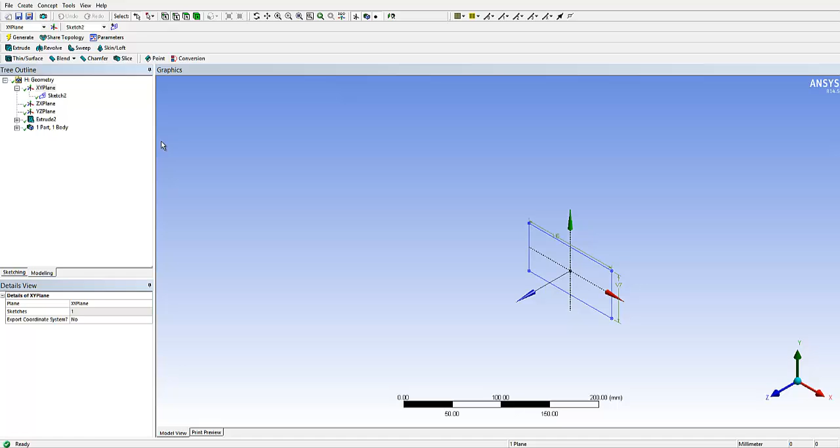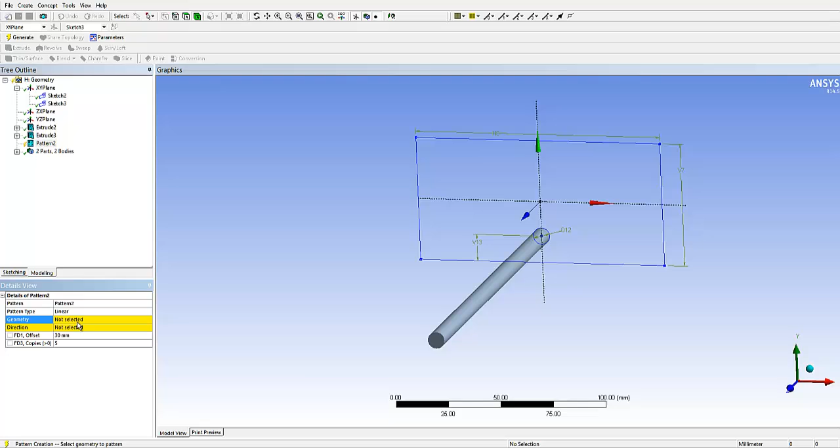In this video, we will be talking about an array of pin fins. We will kick off first, of course, with the geometry of the array. Like the previous example, this geometry involves a set of pins placed inside an enclosure. Here we see how a pattern is being used to make the design easier. The design involves a total of 9 pin fins and, of course, an enclosure.

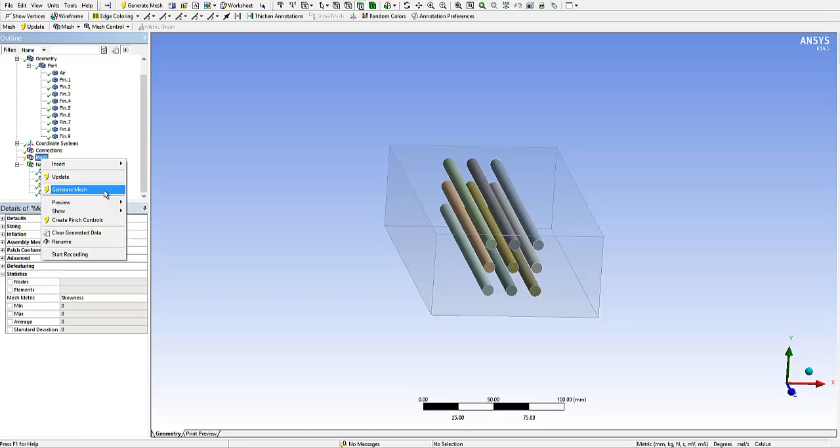After completing the design, we'll now proceed with its mesh. It's preferable to name the parts, or the important parts on which boundary conditions will be set later on in the solver, in order to facilitate the process of assigning boundary conditions.

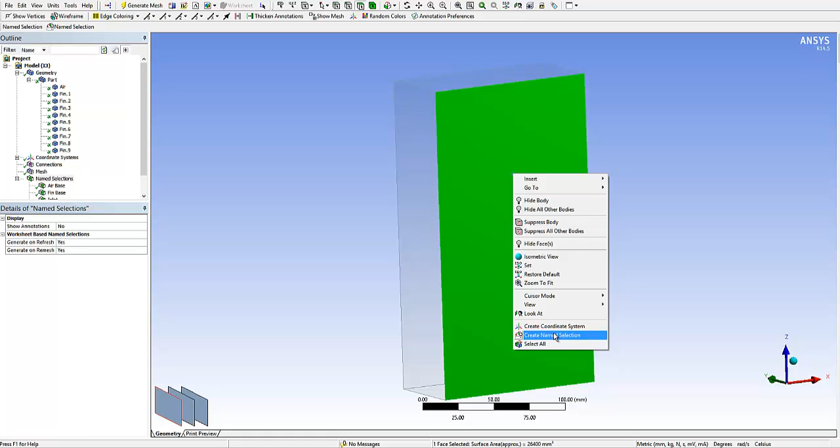Unlike the case of the single pin fin, which had a simple geometry, it is difficult to obtain a high-quality mesh instantly with the array of pins, since we have a rather complex geometry, and therefore several techniques may be used in order to enhance the mesh and its quality.

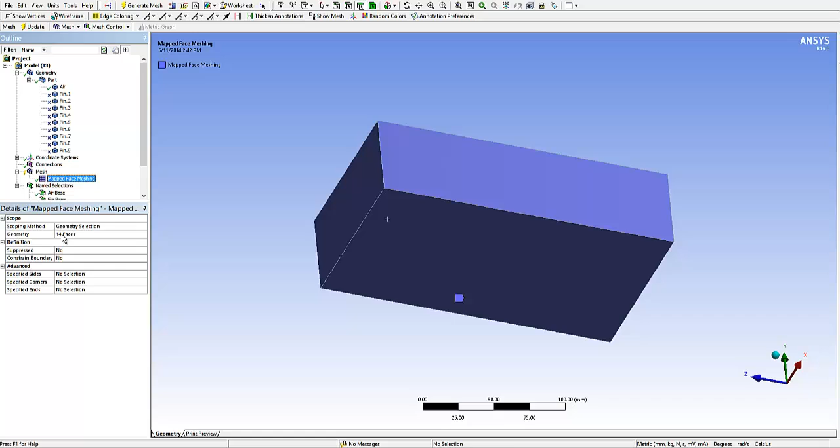One technique used here is called mapped face meshing. It's a process by which a straight and unchanging surface, such as the surface of the fin or the surface of any side of the enclosure, is selected, and the mesh on that side is straightened and mapped into perfectly aligned squares, which in turn improves the overall quality of the mesh.

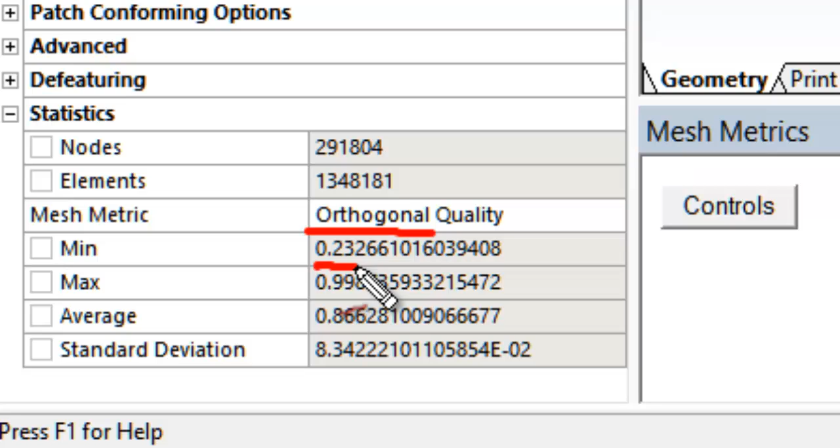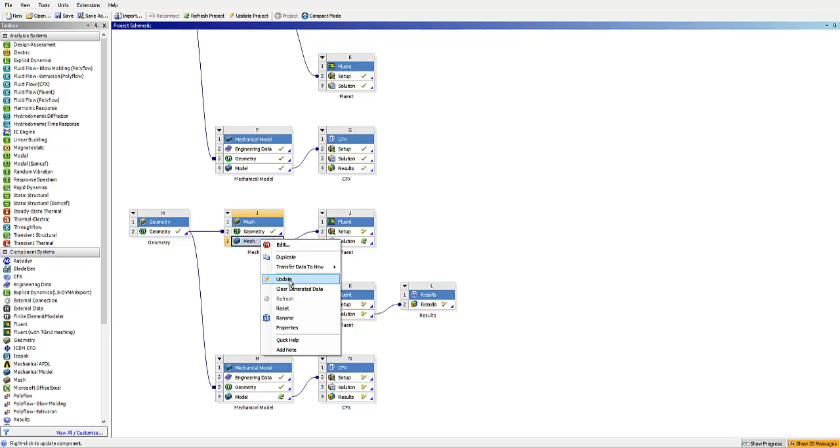In the fluid part of this analysis, we will use identical conditions to the ones applied in the single pin fin, with flow still laminar. All the bases have a temperature of 1000 degrees Kelvin. Also, all the walls of the fins are said to have a coupled treatment. The velocity is 2.5 meters per second.

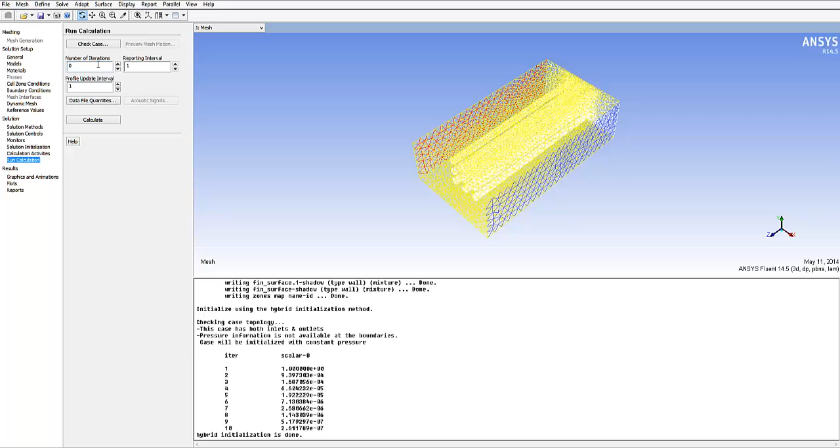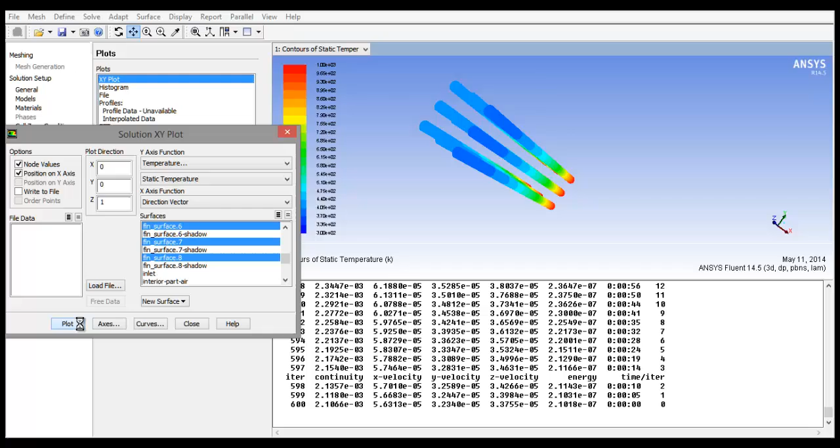After solving the problem, we will now obtain the temperature contours, and we will also see a similar color pattern to the one we obtained in the single pin fin. Also, the temperature curve is decreasing in a similar manner to that of the single pin fin.

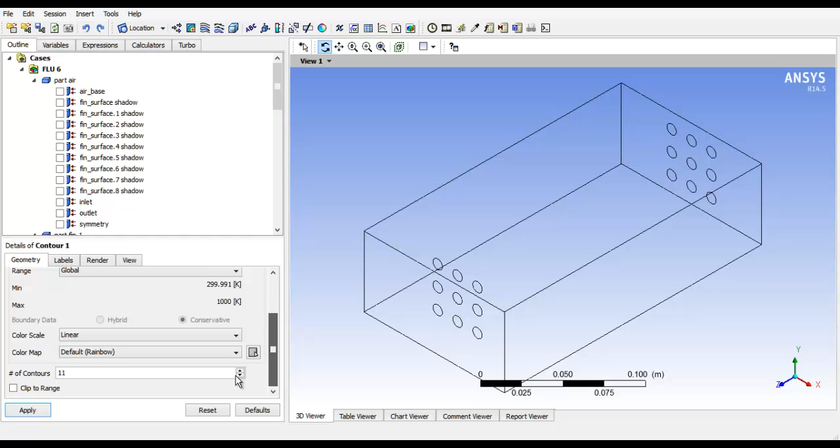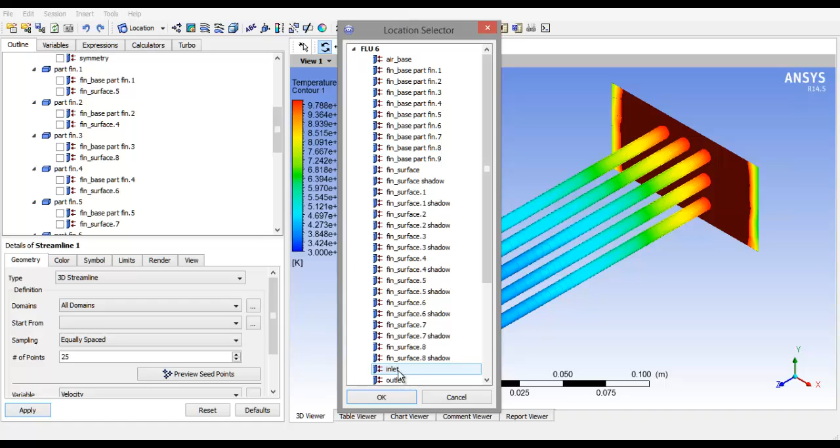Finally, we arrive at the CFD-Post results viewer, where we can view detailed temperature contours and velocity contours of the pin fin design. Here we notice an image similar to that we obtained inside the Fluent contour section. Now we're drawing streamlines of the velocity: the velocity lines that are entering from the inlet and exiting at the outlet.

In this section, the colors are labeled by the maximum and minimum velocities in the region. We notice when the bars are red, this means that they are at the highest velocity, 4 meters per second, and blue corresponds to almost 2.5 meters per second.

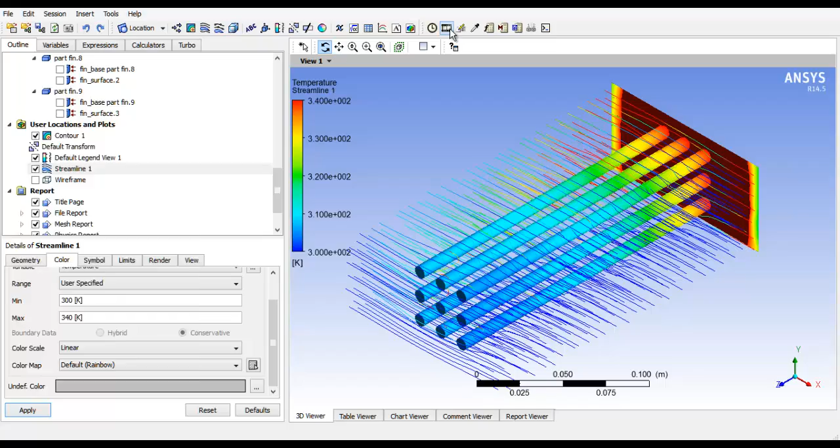Now we're changing the color gradient into the temperature region, where blue means 300 degrees Kelvin and red means almost 340 degrees Kelvin. Notice how near, adjacent to the base, the balls are changing their temperature drastically from 300 to 340 instantly.